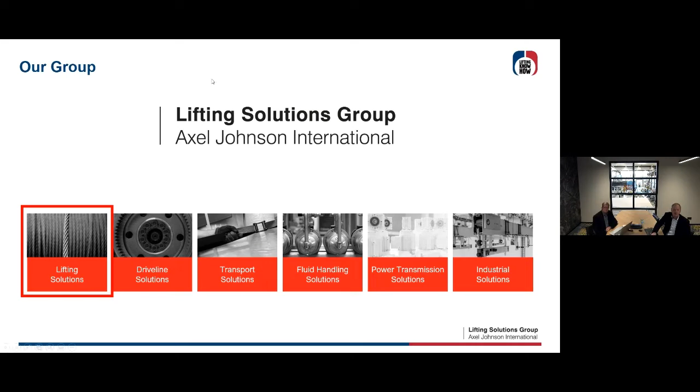First of all, a short introduction about our group. We're part of Axel Johnson International, a big Swedish private company with six very strong business lines. We're part of the Lifting Solutions group, as you can see on the left side. What we do: we're a global player specialized in lifting equipment, fall arrest,

overhead cranes, etc., and of course services. We operate as a group with a lot of local companies, 22 in 20 countries, and around 1,500 employees. We operate in all kinds of industries, from energy, manufacturing, to construction sectors.

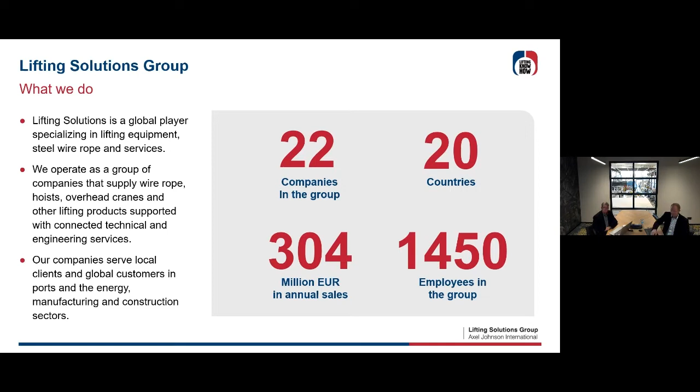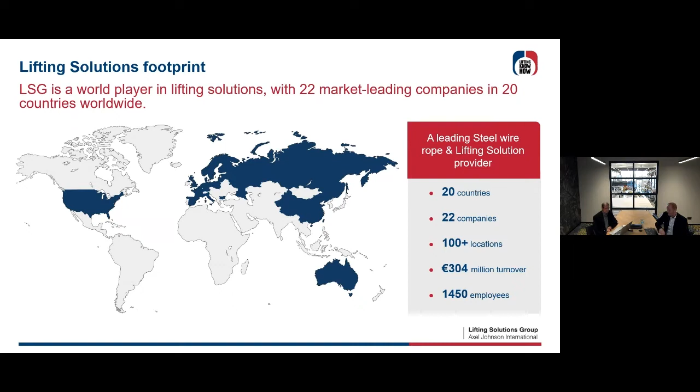It's everywhere. If you see our footprint worldwide, we're mainly operating in Europe, the eastern part of Europe, and Russia, but also in the USA, and since shortly we have 5 companies acquired in Australia. These are all local brands, and I think one of them you recognize from your local company. As you can see, we serve local and global customers worldwide.

This was the short introduction. A couple of subjects we're going to cover: the first 3 bullet points - why lubricate, lubrication methods, lubricants, frequency - will be done by Alain. And the last one, the sustainability aspects, by Elin. I wish you a very pleasant webinar, and I hand over now to Alain.

A very warm welcome to the lubrication webinar. I present myself, I'm Alain Balman, from Belgium. I've been with Mennens Belgium since '86, responsible for steel wire ropes. We do advice, investigations, we make service reports, we climb into cranes, and we have our own laboratory to do investigations and so on.

So I think for the last 30 years we've done a lot of research, and one of the researches we did was lubrication, to see what happens with steel wire ropes and lubrication.

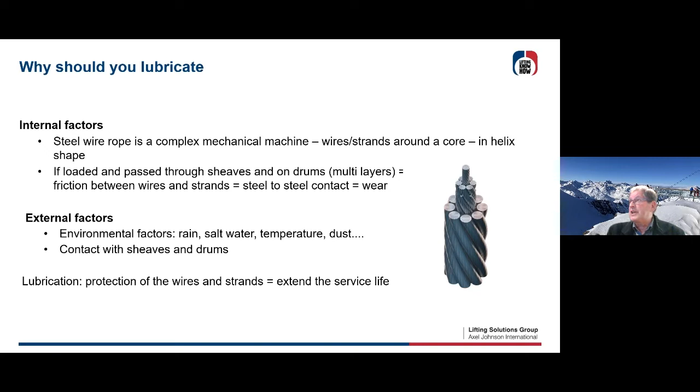for the service life. How much and how long it will last longer, we'll see that later on.

So why do you really need to re-lubricate? Because many people say, yeah, but there is original lubrication already in my wire rope. Normally all ropes are lubricated in production. So between the wires in the strands, you should have, from production reasons, already a kind of lubrication between the wires.

And sometimes you also have some lubrication between the strands. Why is this? Well, this is necessary for production, because if you just want to make strands and ropes without lubrication, you're going to end up with some wires or some strands already fatigued. So you need to have some fluid production, meaning you need to add some lubrication in the production process. So the second reason is the conservation in stock.

Sometimes when the rope is ready, it's going to stay for months or years in stock at the manufacturer, or at different manufacturer stock or sister companies in France or Spain. And then it will be the first lube, let's say, in service when you put the rope into service on your crane.

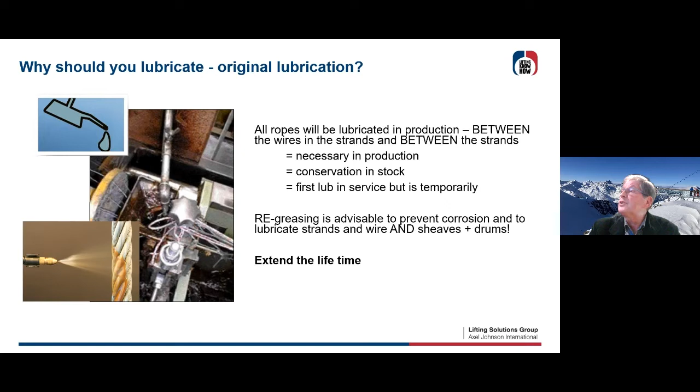And if you use a lubricated rope from the beginning and you re-lubricate it, you're going to end up with an extra 50 weeks. So it's very interesting to see the service life growing, at least in practice, because what I'm talking about here is from a laboratory test.

But in reality, you're going to add at least 20 to 30% to your service life. For some applications like elevators, it's going to be 50%. In other applications, due to certain circumstances, it's going to double up or more.

But what's very important is you're also going to have extra profits, because you're going to have less wear on your sheaves and drums. And normally sheaves and drums are more expensive to change than your ropes.

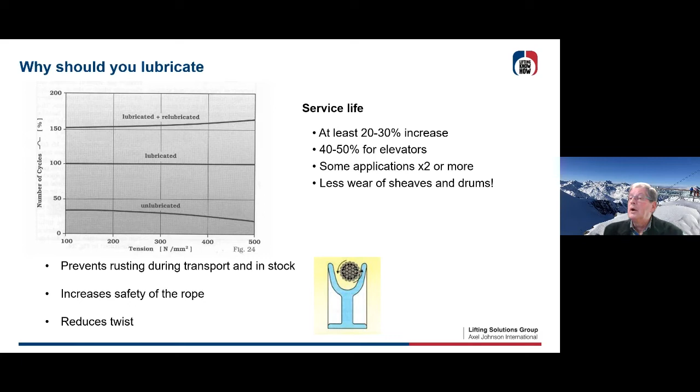And it reduces twist. Rope can twist due to fleet angles on your sheaves. So if you re-lubricate normally or regularly, things will go smoother in your sheaves and on your drums, and there will be no wear or less wear on your grooves.

Okay, what kind of requirements do you normally want when putting lubricant on steel wire ropes? Let's see. On this list, it must have a very good anti-wear effect, to prevent steel on steel contact.

It has to reduce the internal friction between the different parts of the rope—your core, your strands, your outer strands, and the wires within the strands. It must penetrate into the strands and also into the core, so it re-lubricates the whole steel wire rope again.

It has to be stable over a wide, large temperature range. Sometimes there's heat involved in these ropes, let's say 50 degrees or 100 degrees, so it has to be heat resistant. Sometimes it could sustain cold, so that the lubricant doesn't get brittle and stays fluid, so it can lubricate the different parts of your rope.

We need no sticky situation so that sand or dirt will stick to the cable. Sand and dirt could be a disaster when it gets between the strands. So sometimes it's better to avoid a very sticky lubrication—don't lubricate with something sticky, because sand will stick to it and then your rope will be damaged by the sand between the strands.

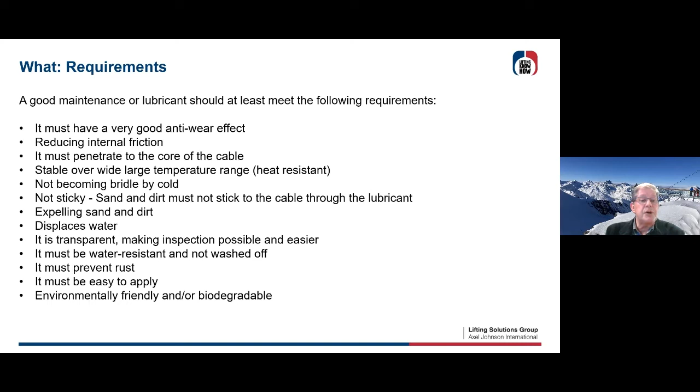If you use lubricant, that will prevent further rusting. And then it must be easily applicable, not taking hours or days to lubricate a rope. We'll focus on that later on. And if possible, it should be environmentally friendly or biodegradable, so it doesn't hurt the environment.

For some steel wire ropes that have an application in water, fresh or salty, there are specific requirements for offshore installations. There are some lubricants which will seal off the cable to prevent water getting in. If you need wire ropes running in the water or in salty sea water, it will protect against corrosion. It has some polar properties in relation to galvanized steel, so the lubricant won't drop off.

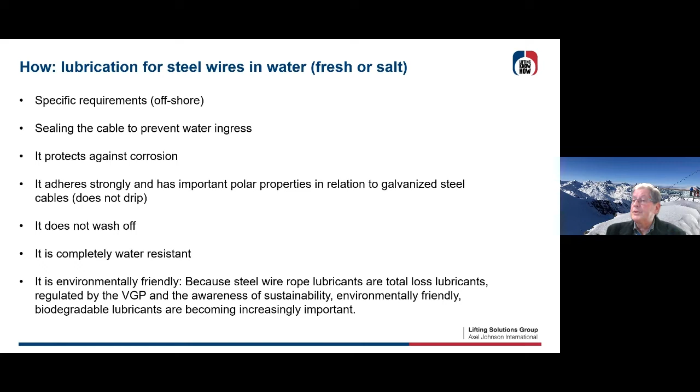In water situations with extreme loads, it should not wash off in the seawater. It must be completely water resistant, so that once lubricated, water will be thrown away from your rope. And of course, again, environmentally friendly lubricants have been coming up for the last 10 or 15 years - very important. We'll talk about this later in sustainability.

How many times should you lubricate? Well, for me, it's easy: when the rope is dry. So steel wire ropes need regular lubricated maintenance.

You have deformation in the cable, in sheaves, you have forces, and you can be certain that your original grease will disappear - it will get out of the rope. So you need to replace it with another grease or oil.

So don't ask me exactly how many times, because I say when it is dry. But of course it depends on your type of application, your conditions - indoor, outdoor, underwater, in dusty environments with sand or seawater.

It also depends on the type of cable. If you have 6-strand or 8-strand or compacted strands, or wire ropes with plastic infill, they don't need a lot of relubrication - that is an advantage. It also depends on the loads.

If the rope is really loaded every time to, let's say, 100% of the safe working load, then lubrication will go out faster, so you need to lubricate more often. It also depends on the temperature - I won't say the lubrication will evaporate, but in certain temperature situations you may need to do more lubrication.

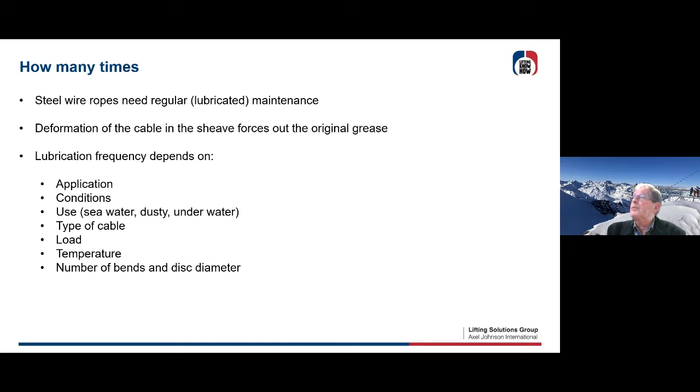And of course it also depends on the number of bends. If you have a lot of sheaves in your application, depending on the diameter of your sheaves or drums, you may need more relubrication.

You can look the regulations up in the norm, where it's mentioned. In summary, there's an indication about lubricating at regular intervals - whether you need to do it every month or every 6 months and so on, depending on how often you use the wire rope.

If the wire rope was out of service for some months or sometimes years due to standstill, then normally before using the installation again, you need to lubricate it a little bit.

And it's always important, especially in areas with bending loads, to look at where to lubricate first. You lubricate the rope where it goes through sheaves onto drums. So if you don't have time or aren't able to lubricate the whole length, just focus on the areas with the most bending.

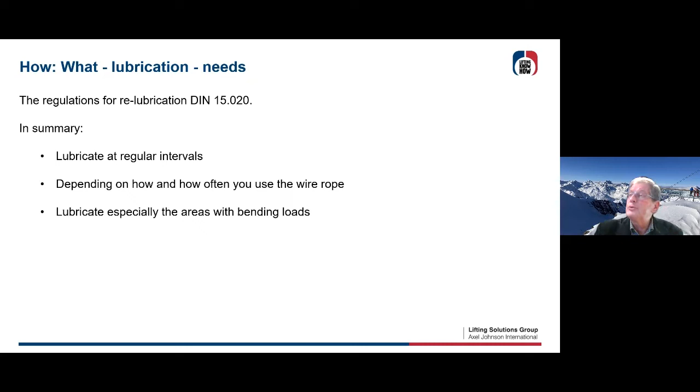You spray it on, and it will enter the strands, all the way till the core. You leave it on for about 30 minutes, and when you touch the wire, you'll feel it's not sticky - the oil has entered into the strands, giving you a water resistant, water-expelling situation on the outside. And you can see that the different wires are visible for inspection.

So there's no dirt, and you can look at the rope. It will be oiled - I could say greased, but it's not grease. It's not a sticky rope. You can also do some dripping or swabbing.

Preferably, you do it where the rope is bent on the sheaves, or you can spray it on the drum. So all of the rope, just put it on the drum or on different layers on the drum, and you spray, drip, swab, or brush it all over your drum.

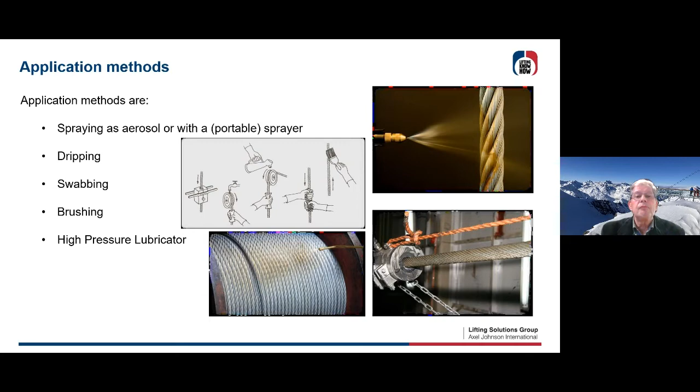For some applications, you can also use a high pressure lubricator system. This kind of machinery is where the rope is completely greased or re-greased under pressure. You have different possibilities and different brands, but you can see on the bottom there, it gives really thorough lubrication, and the rope will look like this when it comes out of these shells.

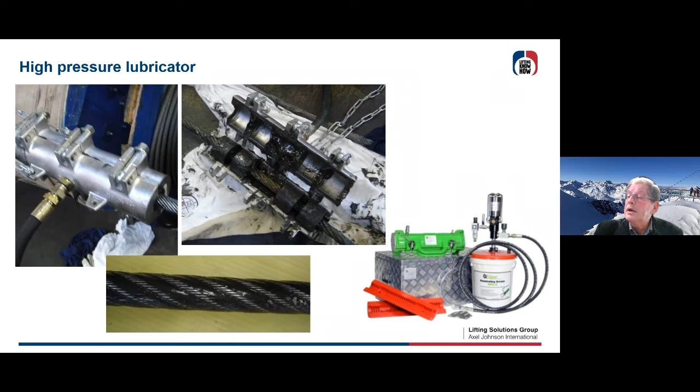The amount of lubricant needed depends on the application, but this is a formula I normally advise: take the rope weight per meter, multiply it by the length to get the kilos of rope you have, then take 1% of it, and put that as liters or kilograms on your rope. So 1% of the wire rope weight.

If you have ropes with plastic infill, take half of it, so half a percentage will do the job. That's my advice. You could also listen to the guys selling the lubricant, and they will double or triple it because they want to sell liters or kilograms. So it's better to stay at 1% or 0.5%. That'll do the job. It's not an advantage to put too much lubricant on the rope.

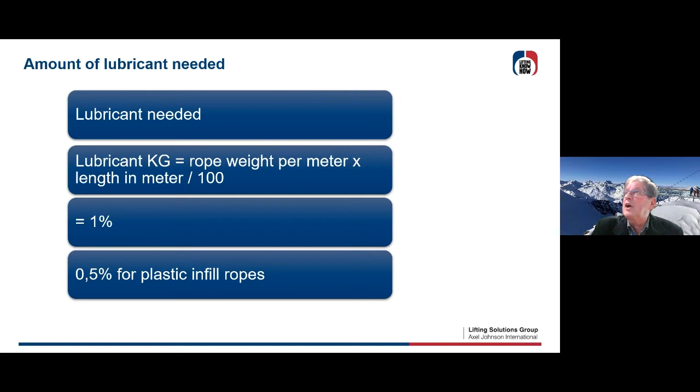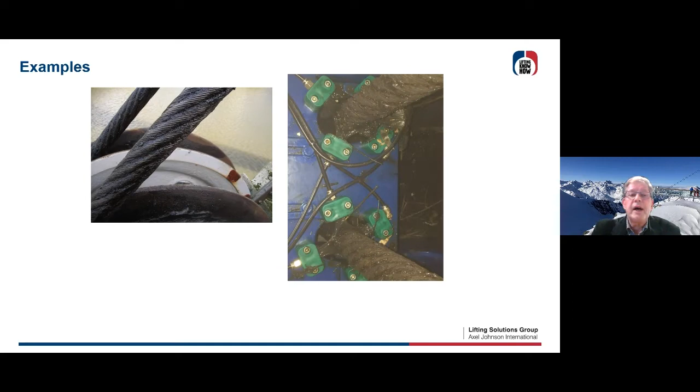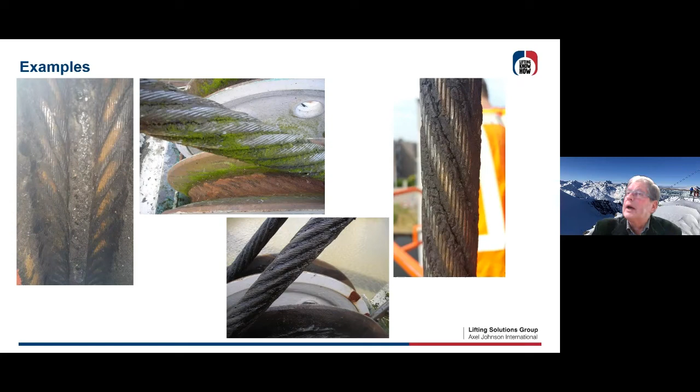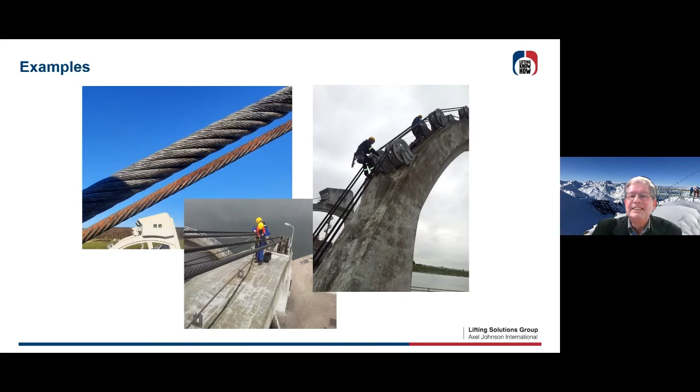Some more examples - ropes which stay on locks like this. You see the rope is very dry, and there could also be a little rusty situation beginning there. You see the guys relubricating the rope there. It's a nice job to do, but you need to do it.

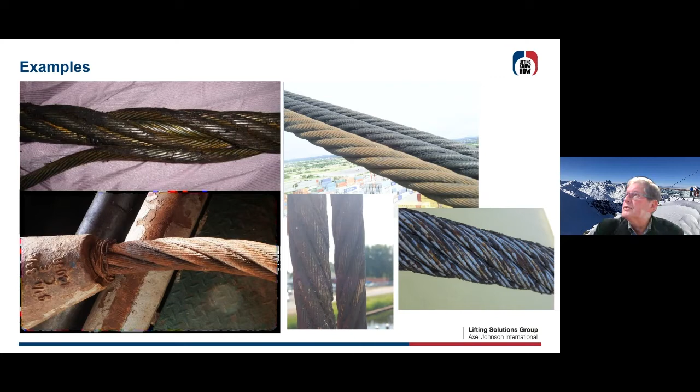On the right, you see rusty situations coming from a little damage to the outer wires in galvanized rope. So lubricate, lubricate. And then I end up with: don't lubricate heavily corroded ropes.

So if your rope is completely rusted, then the strands and the different wires are so corroded that they become connected to one another. The rope will hold because there is an increase of friction between these different wires. And if you're going to add lubrication, this whole situation will loosen up. So big accidents can happen, your cable could break spontaneously, if you re-lubricate a completely corroded rope.

If you see corroded cables, you're going to end up with only one fifth of your lifetime. So it's too late then.

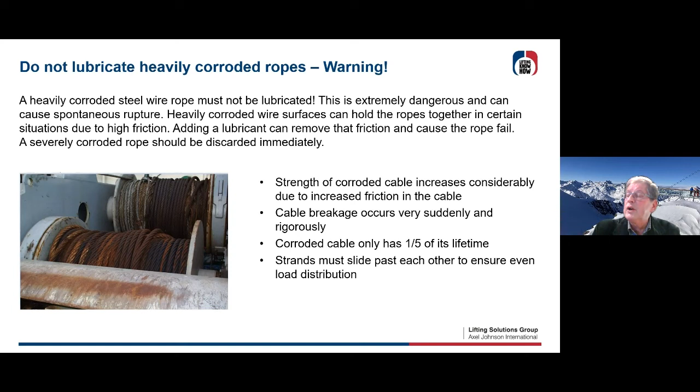The strands must slide past each other to ensure even load distribution. Sometimes you'll see rusted, completely corroded ropes only pulling on 2, 3, or 4 strands, so there's an uneven load distribution in your rope. Heavily corroded ropes, be careful, you're going to loosen up all the different parts. So don't re-lubricate very corroded ropes, but change them.

Well, that's it. I'm interested in your questions, we'll tackle them in 10 minutes.

And now we go to Elin. Sorry, I'm Alain, but this is my twin sister. Yeah, exactly, thank you so much Alain. She's gonna say something. Okay, alright, thank you so much.

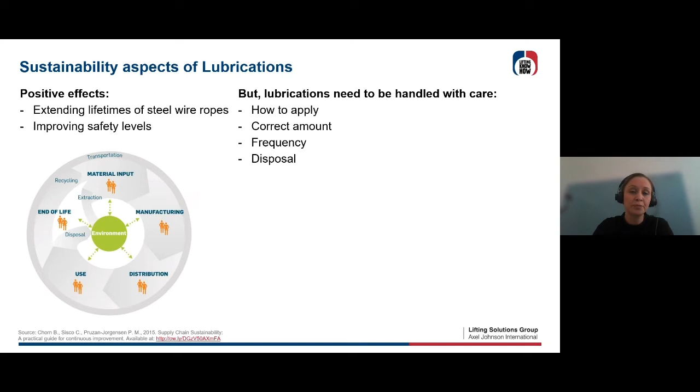And then we can move over to the next slide, please.

Although there are challenges with lubrications, there are actually better environmental choices of lubrications on the market. Priority number one is, of course, that the lubrication should be fit for its purpose. But thanks to, among others, the increasing oil prices and increased environmental considerations to avoid negative effects of spillage of lubrication, that has really led to the development of new and less environmentally harmful lubrications.

So today there are a set of lubrications considered environmentally accepted lubrications, called EALs. And those need to fulfill a set of requirements, which means that they are more biodegradable, they have a certain level of renewable content, and they are less toxic and non-bioaccumulative.

Some vendors of lubrications have either internal self-certifications to ensure the fulfillment of EAL, but there are also labeling programs and third-party certifications. Some examples are Blue Angel, European Eco Label, the Nordic Swan, the Swedish standards, and so on. So that's something worth looking for when choosing lubrication as well.

So this was actually just a very short introduction to the environmental and sustainability aspects of lubrication. To summarize, the positive effects really win over the negatives, mainly thanks to the capacity of prolonging or extending the lifetime of the steel wire ropes.

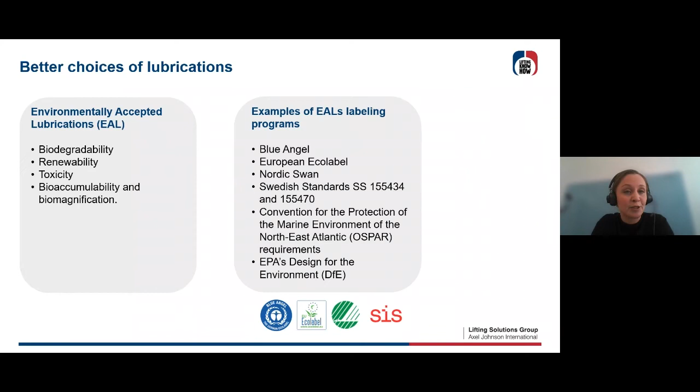And with good lubrication management and usage of the EALs, or environmentally accepted lubrications, you can really reduce the environmental footprint even further. If you want more information about how to extend the lifetime of your steel wire ropes, I really recommend you watch our last webinar about MRT, or magnetic rope testing. Thanks.